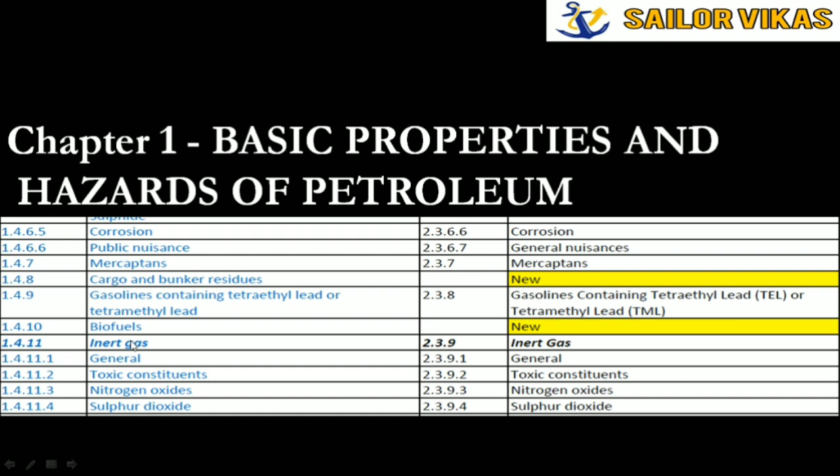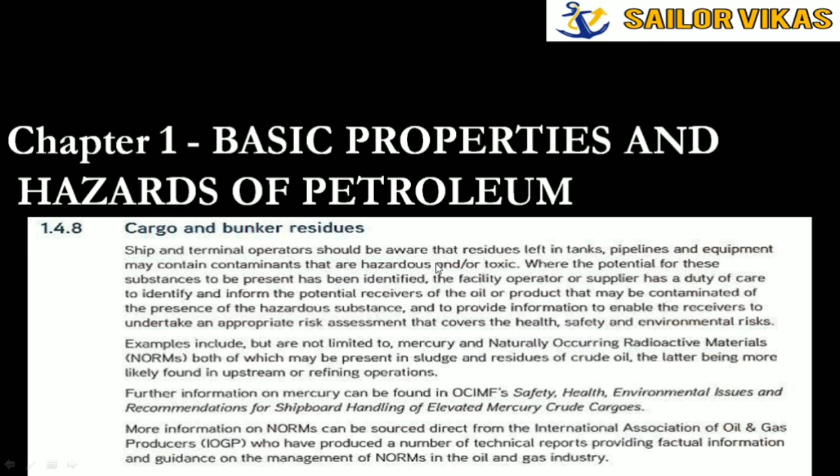Here are the changes in chapter 1, basic properties and hazards of petroleum. You can see that cargo and bunker residues are also petroleum products - although they are residues, they still have hazards. That is the reason they have introduced this section in ISGOTT chapter 1. Similarly for biofuels - they have written that ship and terminal operators should be aware that residues left in tanks, pipelines and equipment may contain contaminants that are hazardous. This is an overall statement about cargo and bunker residues, and similarly for biofuels, mentioned specifically to note that this also exists.

Other than this, chapter 2 is gas evolution and measurement. As you can see, this yellow portion is all newly introduced. For example, volatile organic compounds - this was not there in ISGOTT 5. They have added a small paragraph mentioning volatile organic compounds.

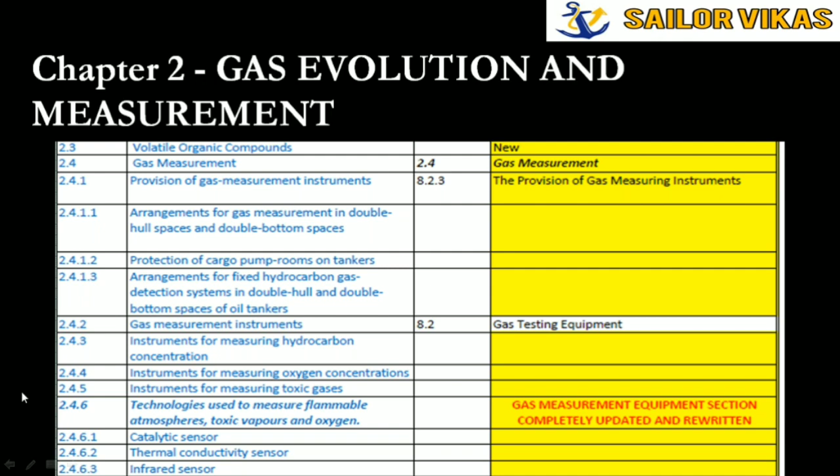Then next is about gas measurement. As you can see here, it is very exhaustive - I cannot explain it in full detail, but I will give a complete idea of what's new. Now you can see catalytic sensor, thermal conductivity sensor and infrared sensor. For the catalytic sensor, they have mentioned the operating principle. This is as per the latest technology, which is why it's important to know about all these things.

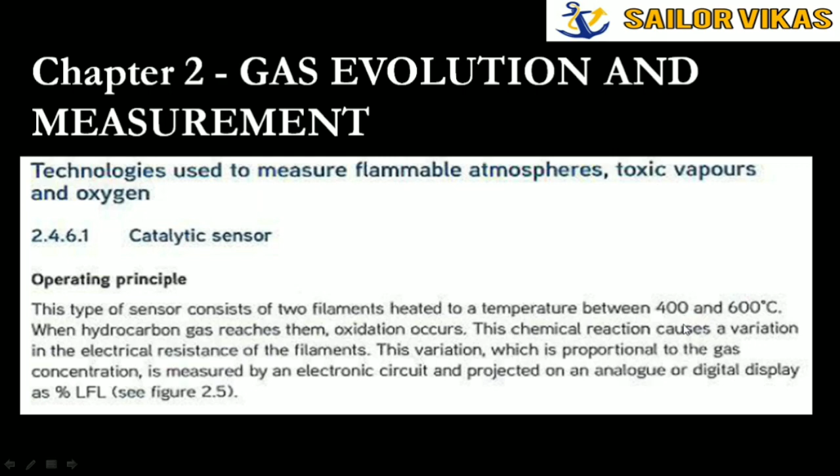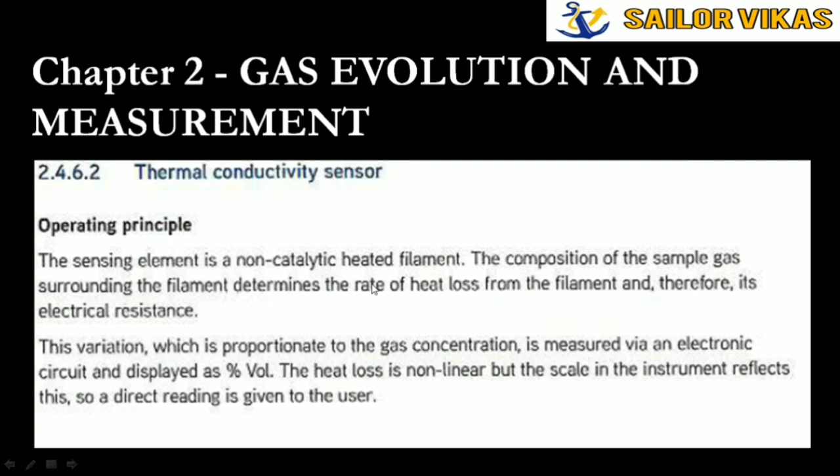The catalytic sensor is heated to a temperature between 400 and 600 degrees Celsius. They have introduced new diagrams for the catalytic heated filament sensor. Then the thermal conductivity sensor, also called non-catalytic heated filament - so they are both similar, this one being non-catalytic and the previous one being heated catalytic filament. Then again diagrams, followed by the infrared sensor with its own diagrams. So all these new technologies have been introduced with good pictures to help understand them.

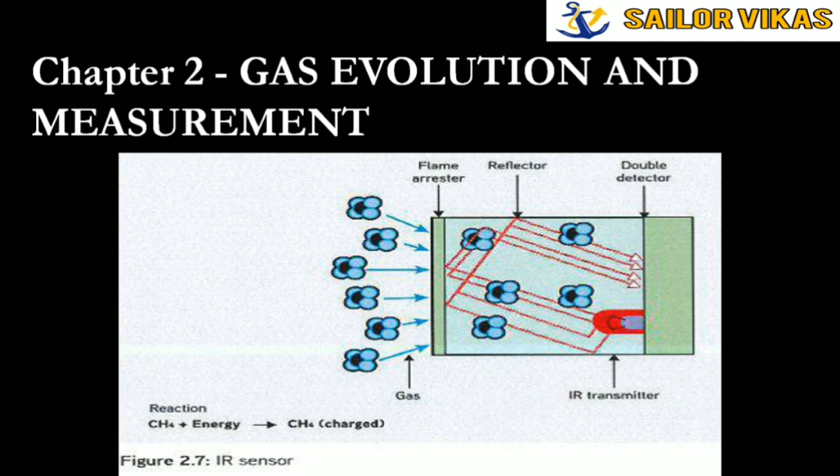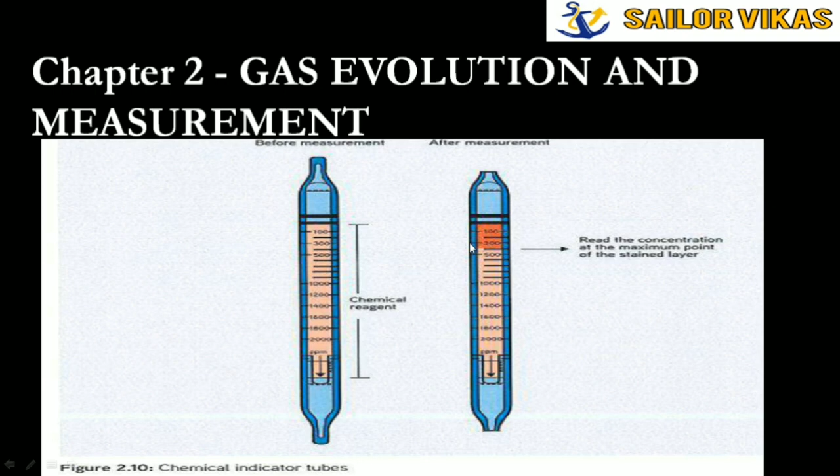Then there are the chemical indicator tubes, again with diagrams showing their use, the principle, the cautions to be observed before use, and the procedure to be followed. Then comes the paramagnetic sensor and calibration, etc.

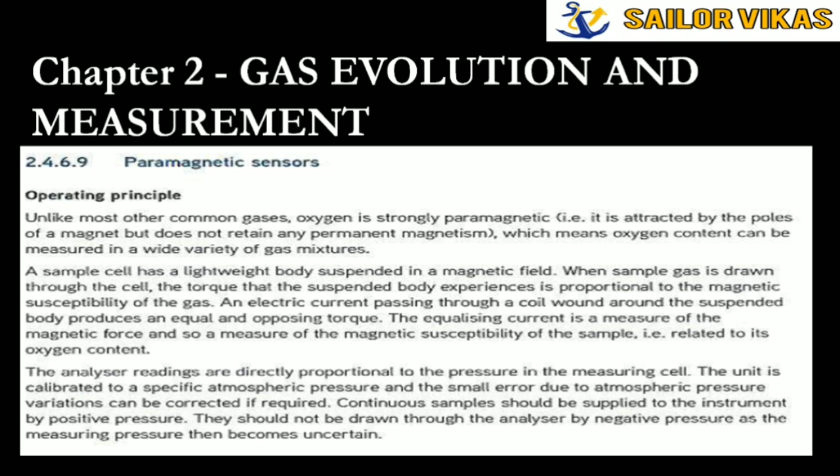The paramagnetic sensor also has a brief explanation in simple terms. They have made it very simple in ISGOTT 6, along with diagrams.

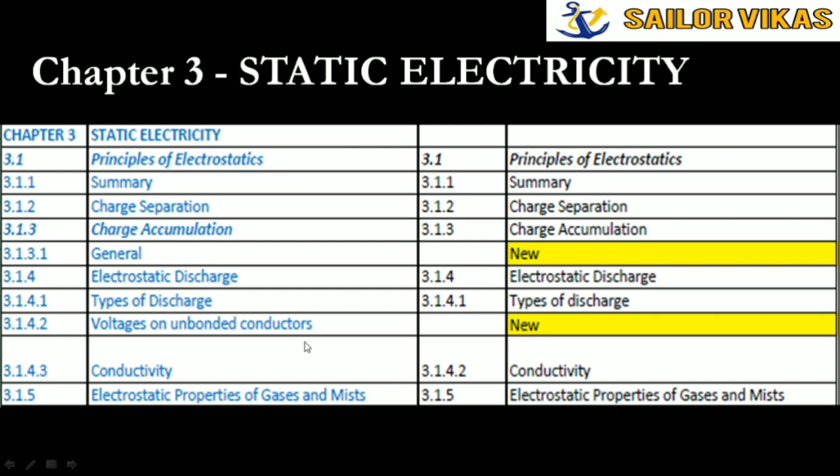Next is chapter 3, which is static electricity. Here they have introduced new sections like general and voltages on unbonded conductors. This has been newly introduced in ISGOTT 6.

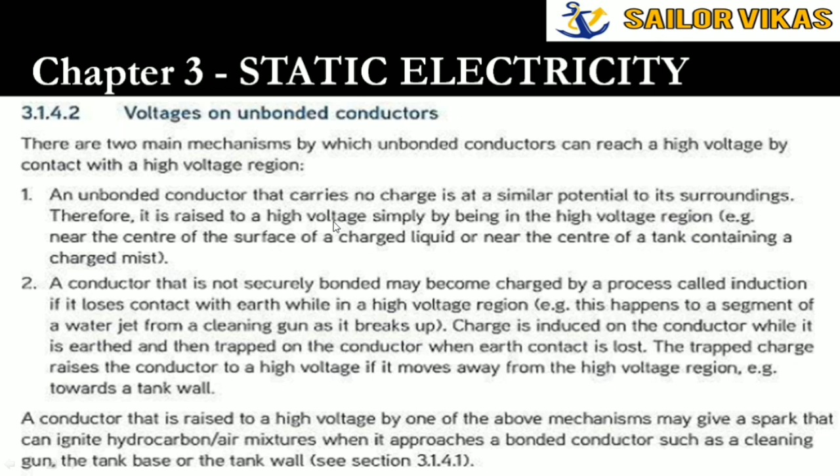This hierarchy of controls we have also learned in shell training, where you have these 5 stages: elimination, substitution, engineering controls, administration controls, and the last was PPE. So they have introduced this hierarchy of controls also in chapter 4.

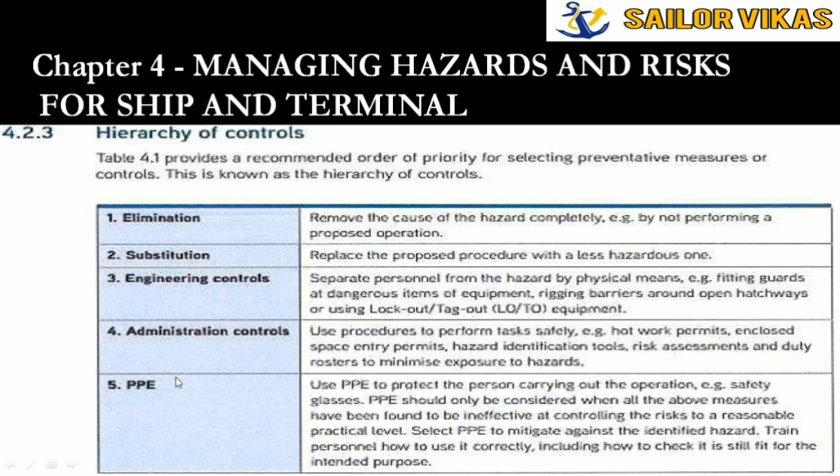Other than this, the new thing which they have introduced is stop work authority, known as SWA, and lock-out/tag-out. Stop work authority is similar to the stop card which we use on board. It is recommended that tanker and terminal SMS include a stop work authority policy and procedure. That is the new thing which they have introduced.

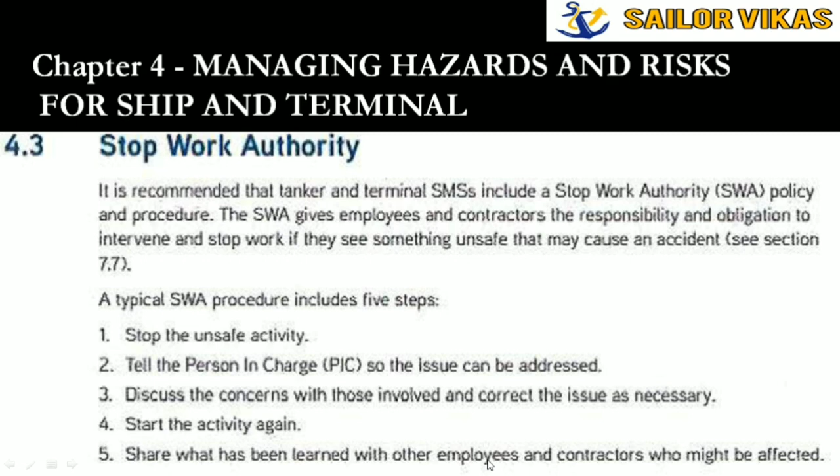Basically this stop work authority procedure includes 5 steps. You have to stop, then tell the person in charge so the issue can be addressed, whatever the issue is why you have stopped the work. Then you can discuss the concerns and correct the issue, after that you can start the activity again, and share this so other people can learn. So this is the new thing introduced, stop work authority.

The next is lock-out/tag-out. This is also introduced. We already know about this, but they have introduced it formally in ISGOTT 6. This is the lock-out/tag-out.

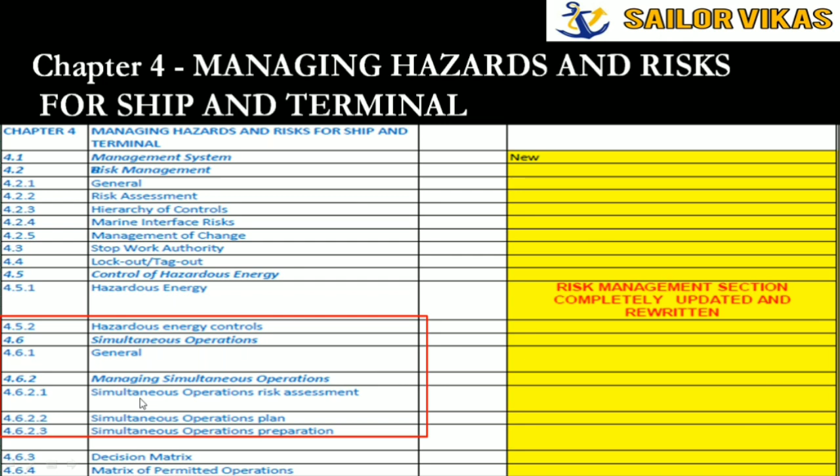Then next is the introduction of simultaneous operations. They have introduced simultaneous operation, how to manage it, what plan you have to make, what risk assessment you have to do. They have given detailed explanation and information about simultaneous operation, and how simultaneous operations cause issues when there are too many operations at the same time.

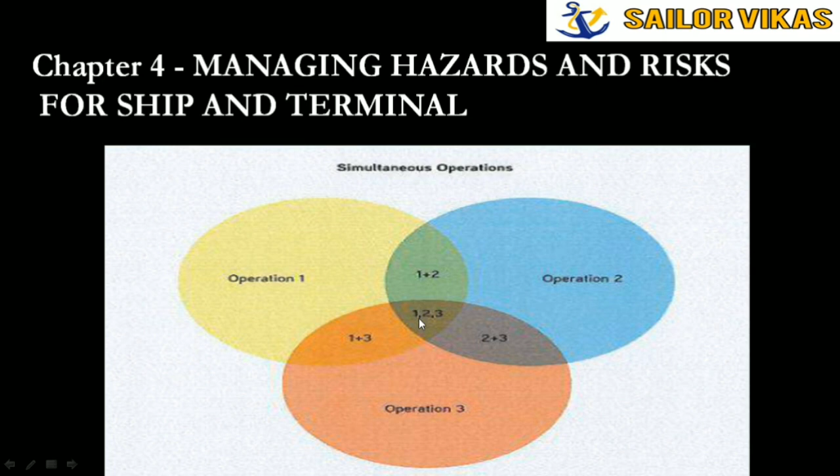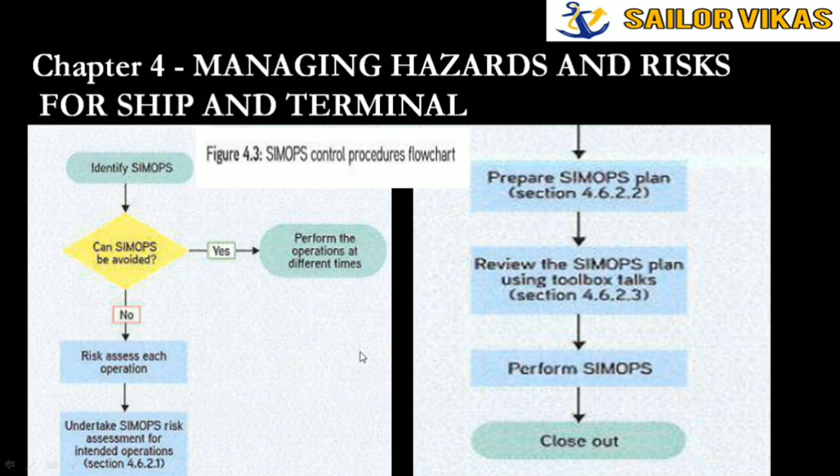Then they have made a flow chart: you have to identify SIMOPs, then ask can it be avoided? If no, then you have to make the risk assessment, discuss in the toolbox meeting, etc. So this is what they have introduced in ISGOTT 6 chapter 4.

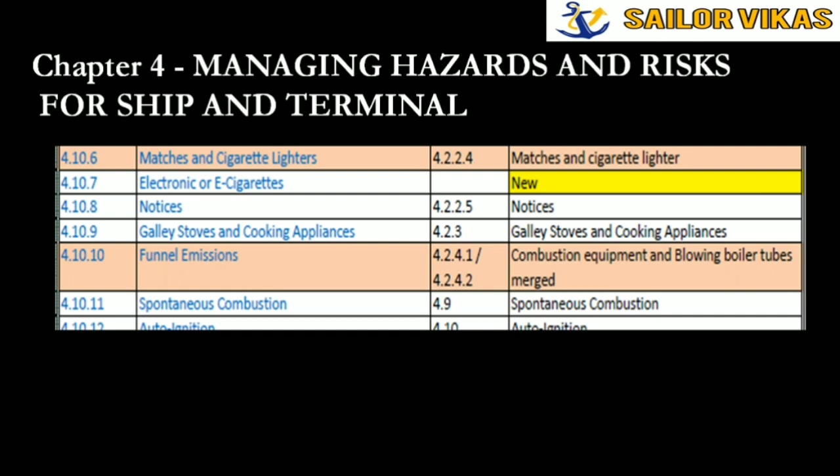Then there is also introduction of electronic e-cigarettes, newly introduced in ISGOTT 6. They state that the existing smoking rules also apply to the use of electronic or e-cigarettes. So if you have an e-cigarette, it doesn't mean you can have it on the bridge. This should be clear.

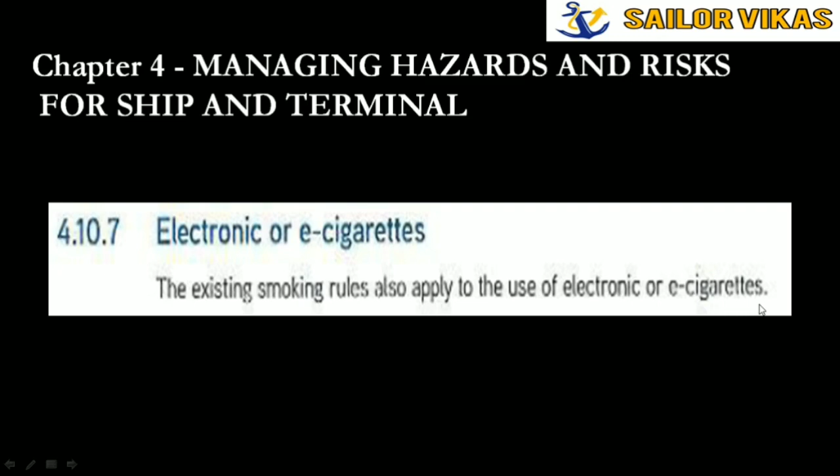Other than this, if smoking is not allowed on the bridge, you should not use e-cigarettes either, because the same rules apply for smoking.

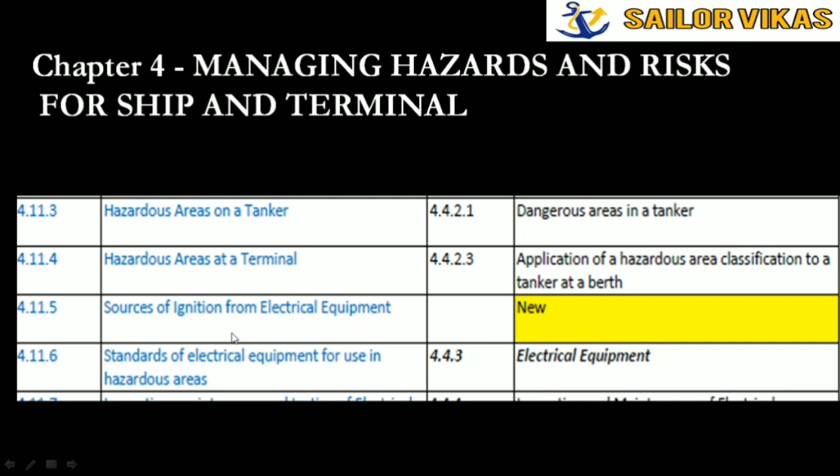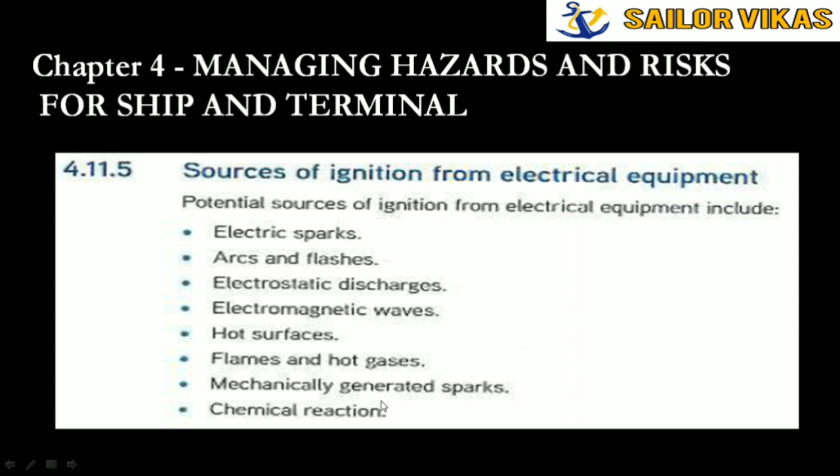The next new topic is sources of ignition from electrical equipment. This has been newly introduced. They have listed electrical equipment as also a source of ignition. For example, electric sparks may occur, electrostatic discharges, electromagnetic waves, chemical reactions - these are all causes and sources of ignition.

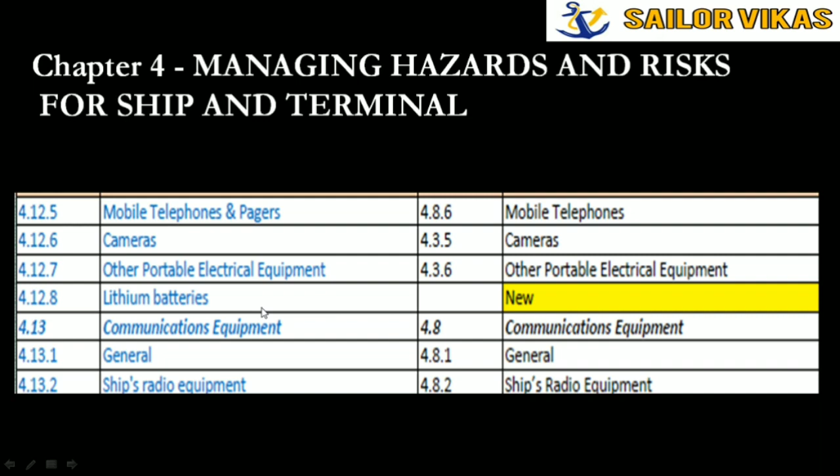Then next is lithium batteries. Initially in ISGOTT 5 this was not there. A new section on lithium batteries has been introduced in chapter 4 itself, where they speak about lithium batteries being used in a wide variety of applications, and there are 2 main types: one is primary, that is non-rechargeable, and the second is rechargeable.

These batteries have a high energy power source and they can cause fire or explode. So it is mentioned that these batteries are also hazardous and they pose risk for ship and terminal. That is why they have introduced these lithium batteries.

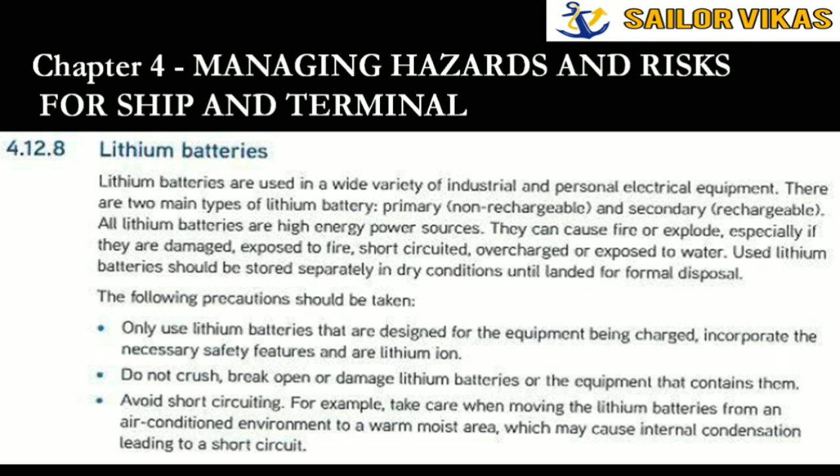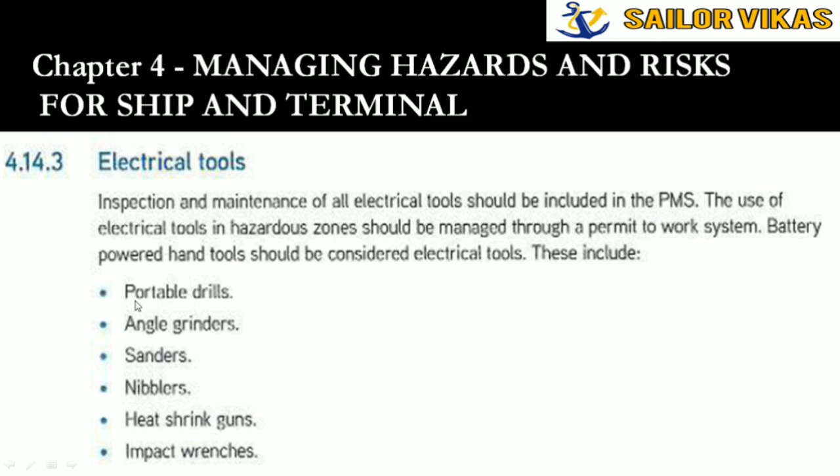Next, the new things they have included are electric tools and hydroblasting. These also have hazards, so they have stated that electrical tools should be properly maintained and included in the PMS, that is the planned maintenance system.

They have given some examples for the electric tools. Similarly, for hydroblasting, they have considered it a hazardous activity that should be controlled through the SMS and permit to work process.

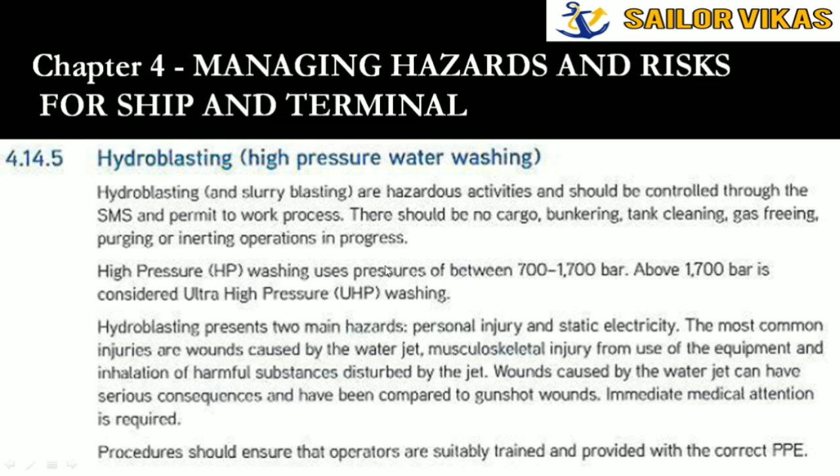They have given an explanation about the hazards. There are two main hazards: personal injury and static electricity. That is the reason there should be no cargo or bunkering, tank cleaning, gas freeing, inerting, or purging operation in progress when doing hydroblasting. That is what they have told clearly in ISGOTT 6.

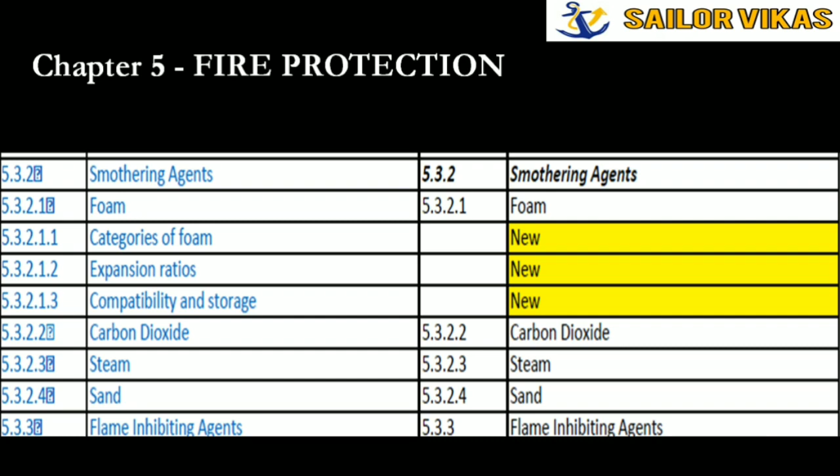The next thing is in chapter 5, fire protection. They have introduced categories of foam. This was there earlier also, but the expansion ratios have been newly told to us - what are the categories of foam, the expansion ratios, I will tell you the changes, and the compatibility and storage, how you store this foam.

They have given that if there is a fluoroprotein foam, then it is a part of protein foam. And if it is an alcohol resistant AFFF foam, then it is a synthetic foam. They have clearly given us an idea of which is a synthetic foam and which is a protein foam.

Sometimes even I had got confused if I had AFFF foam on board and was not knowing whether it is a protein foam or a synthetic foam, because in SIRE requirement they say both have different requirements. So ISGOTT 6 has clearly distinguished between the two types of foam.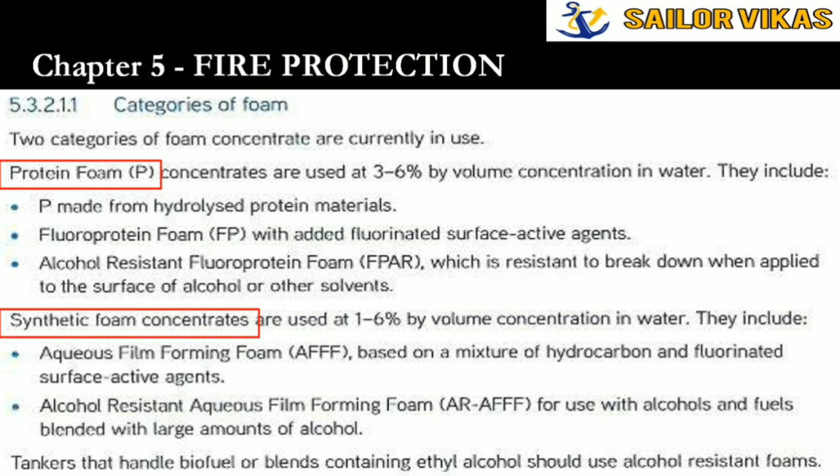Then the expansion ratio. For high expansion foam, there is now a synthetic high expansion foam mentioned in ISGOTT 6, where they have given a ratio of 200:1 to 1000:1. And for enhanced high expansion foam, they have given an expansion ratio of 250:1 to 1000:1. So this is about high expansion foam.

They are nearly the same. But for medium expansion foam, it is now written as 20:1 to 250:1. For ISGOTT 5 it was 15:1, but for ISGOTT 6 it is 20:1. This is an important thing to remember - this is a change made in ISGOTT 6. It was 15:1 earlier; rest all things are the same.

The 3:1 and 15:1 ratios are also the same, but this medium expansion foam has been changed. And the synthetic high expansion foam and enhanced high expansion foam were not mentioned in ISGOTT 5, but now they have mentioned them and given different expansion ratios for both foams. I hope this is clear.

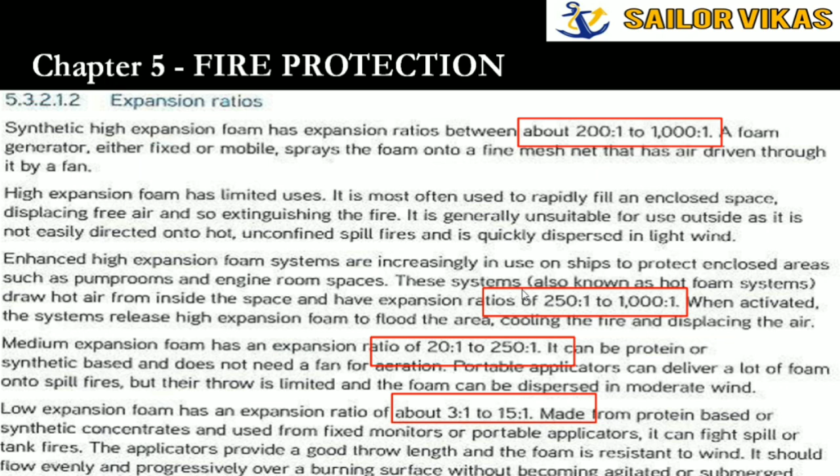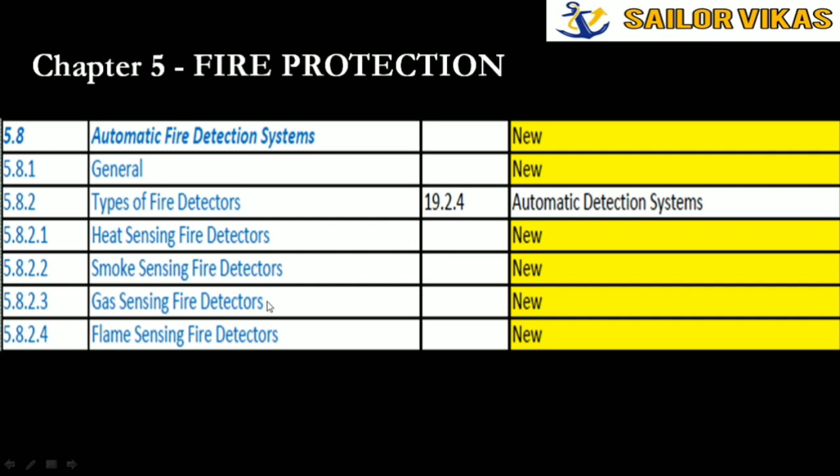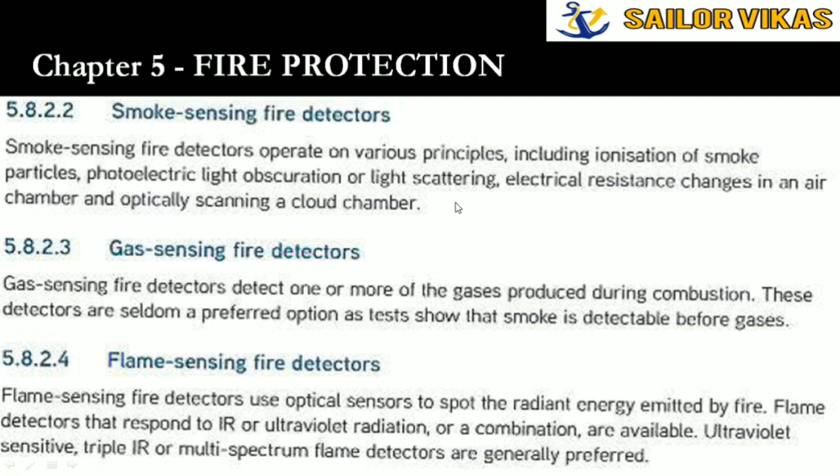The next changes made in the same chapter 5, fire protection, are the detectors - the types of fire detectors: heat sensing, smoke sensing, gas sensing, and flame sensing. They have introduced all this new along with the automated fire detection system section. They have given detailed theory about all types of fire detectors.

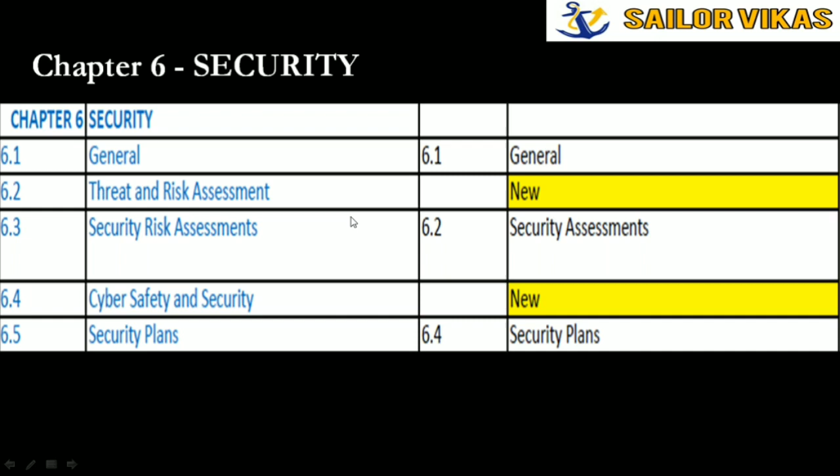So in this 6.2 threat and risk assessment, they have introduced a threat triangle where removing one side of the triangle will minimize the risk. There is capability, opportunity and intent. So if you remove any one part, similar to a fire triangle, the risk of threat can be minimized. It cannot be eliminated, but it will be minimized.

So they have given clear definitions of what capability means, what intent means, and what opportunity means. Capability means attackers have the physical means to attack. Intent is demonstrated by the will and means to attack. This is what they have defined about the parts of the threat triangle.

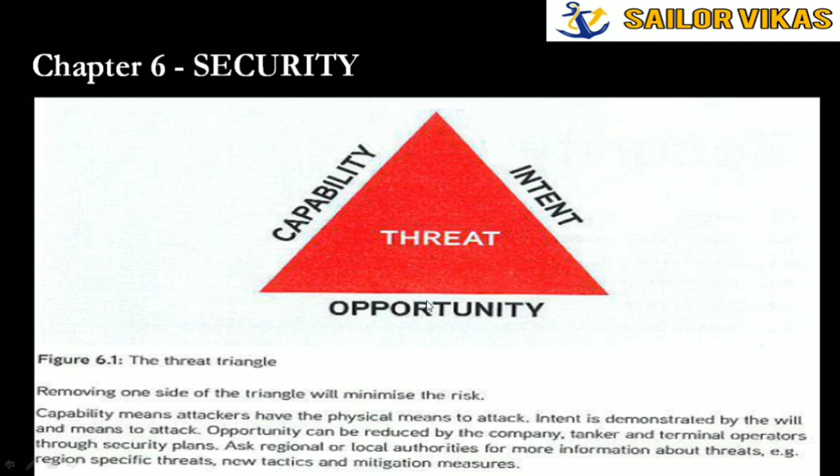The next is cyber safety and security. They have clearly mentioned about cyber safety and security. Cyber security is concerned with the protection of IT, operational technology, information and data from unauthorized access, manipulation and disruption. Cyber safety covers the risk from loss of availability or integrity of safety critical data. OT is operational technology. That is why this has been introduced to minimize cyber crimes.

The cyber security risk assessment should consider threats to cyber safety and cyber security, because attacks there can harm personnel, environment and the tanker or terminal. Since ISGOTT is for tankers and terminals, cyber safety and security is an important chapter. The IMO has adopted this maritime cyber risk management. So this is an extract of ISGOTT 6.

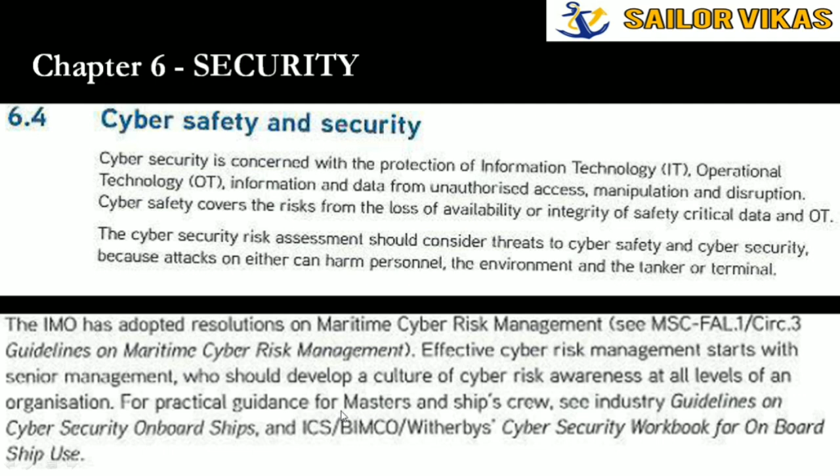Next is an important chapter, chapter 7, which has been completely introduced new, human factors. Now in human factors, the human element, they have introduced a lot of things about risk assessment, then leadership and confidence to stop the work or speak up. Fatigue and manning levels were already there in the previous ISGOTT 5, but topics like risk assessment, leadership and confidence to stop the work have been introduced newly in ISGOTT 6.

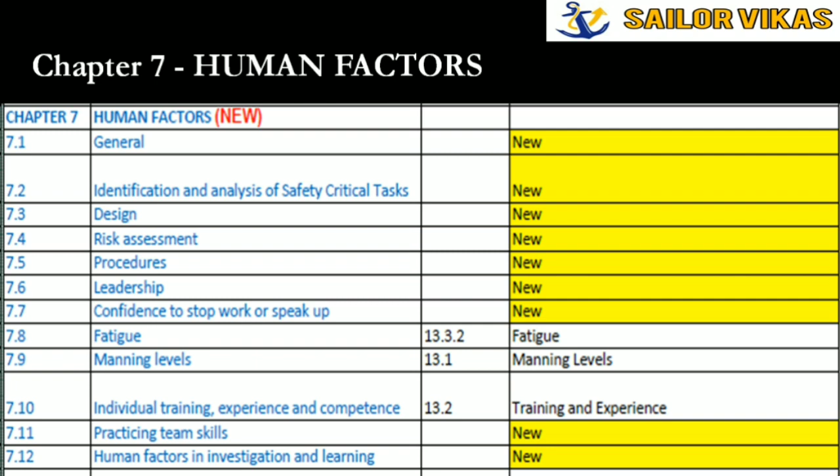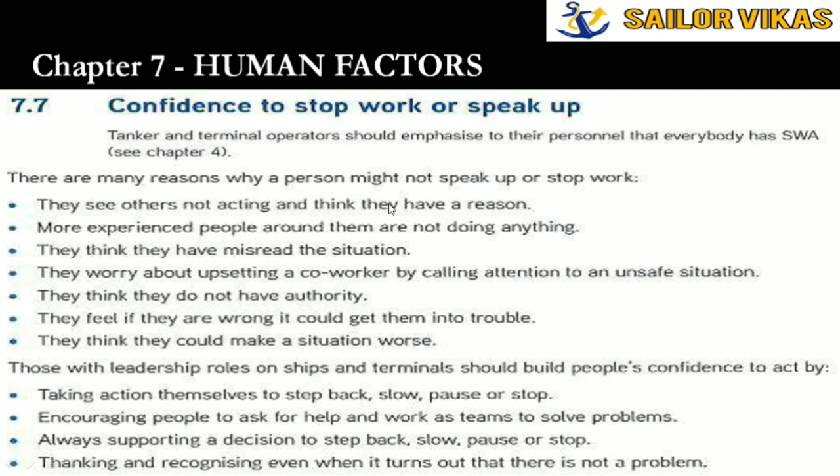So they have introduced this section for leadership, and confidence to stop the work or speak up. They have also told us about human factors, that there are many reasons why a person might not speak up or stop work. These are all examples of why he may not speak up. That is why there is a need for confidence to stop the work or speak up. Thus human factor is very important as per ISGOTT 6.

Then there is chapter 8, alternative and emerging technologies. This is my favorite chapter. This chapter is also introduced newly in ISGOTT 6. Now as you can see, alternative and emerging technologies.

For example, earlier we were using charts, now we are using ECDIS. This is an emerging technology which we are using in the current phase. Similarly in cargo, we have touchscreen cargo panels, we have alarms, and just by sitting in the cargo control room we can get all the soundings of our tanks. So these are all emerging technologies which are coming up day by day. New things are coming up, and that is why they have introduced this chapter.

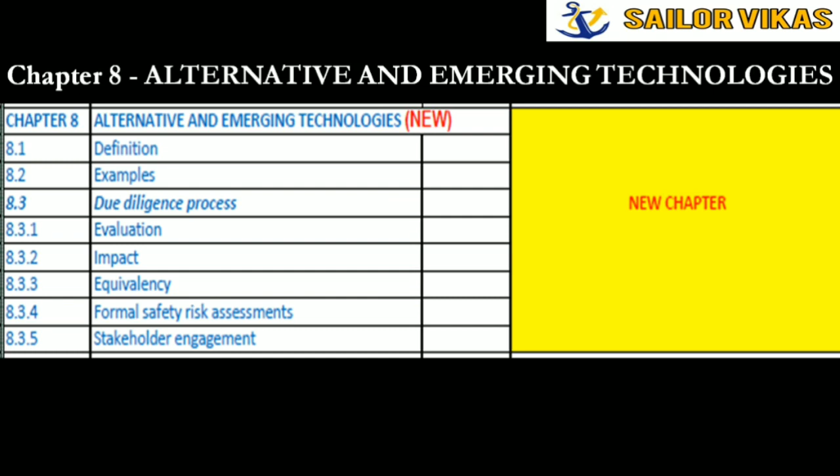Now the importance of this chapter I will tell you further. Chapter 8, alternative and emerging technologies, describes how alternative and emerging technologies can be assessed to make sure they do not affect the safety on tankers and terminals. Because of new emerging technologies, there is a chance that they will affect the safety on tankers and terminals. Thus they have made this chapter so that we know this emerging technology should not harm our tanker industry.

Similarly in MEG it has been mentioned about emerging technologies, so you can go through there and refer to get some knowledge about that. For example, what are the emerging technologies? There were autonomous ships, autonomous underwater vehicles, intrinsically safe electronic tablets and telephones, drones, aerial drones, etc. These are all examples of emerging technologies, and these technologies should not harm the tanker and terminal. That is the reason they have introduced this chapter 8 in ISGOTT 6.

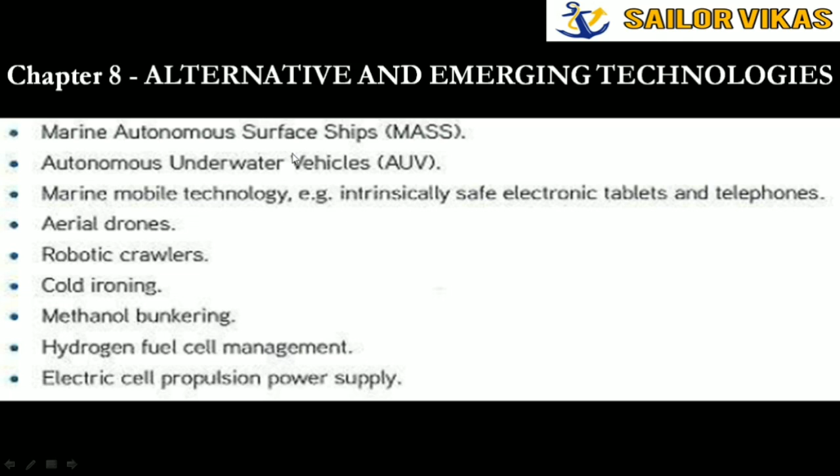Next, in the same chapter they have introduced a section on impact, which I found little important. This impact section tells that whenever there is an emerging technology, there should be an impact assessment done before agreeing to use the same technology. After you do the impact assessment, you will come to know what all things can go wrong. That is why they have introduced this section in chapter 8 in ISGOTT 6.

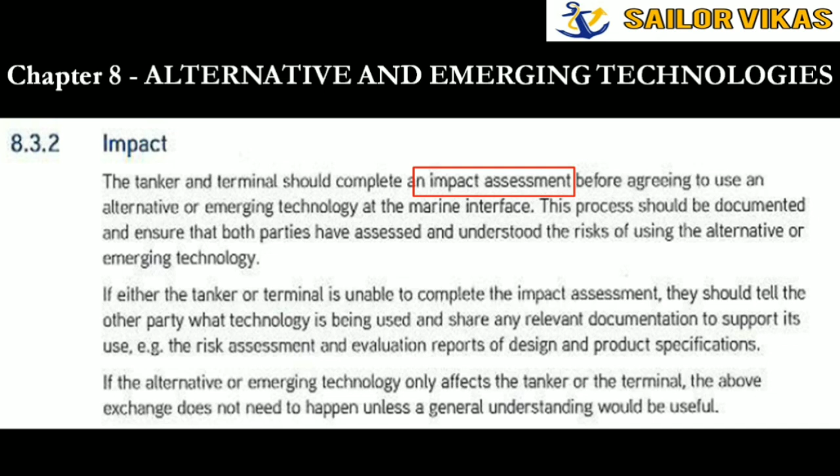Similarly, equivalency. If we are using the old method and there is an emerging technology, there should be a method of equivalency. Both should demonstrate the same things with good output. That is why there should be an equivalency, and that is why they have introduced this section in ISGOTT 6.

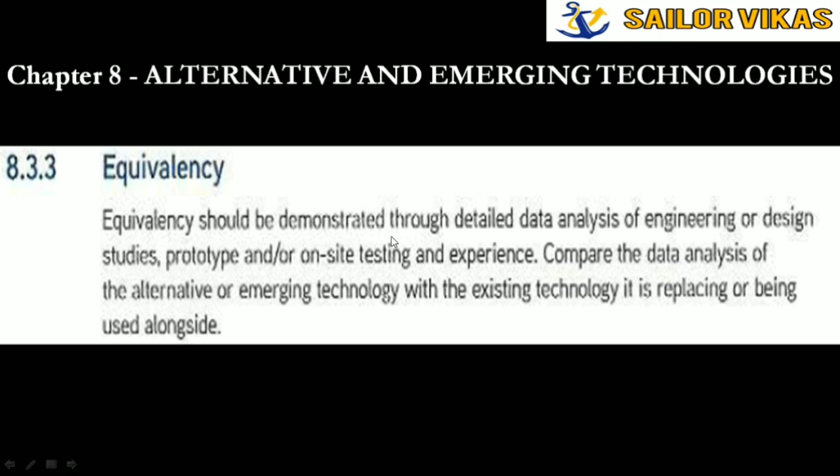Next is definition of hot work. They have introduced this. Earlier we didn't have the proper definition of hot work, so they have given a proper definition of hot work.

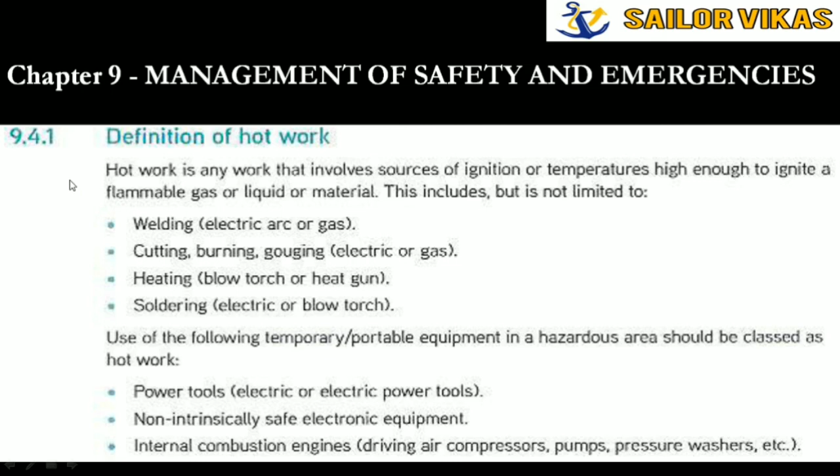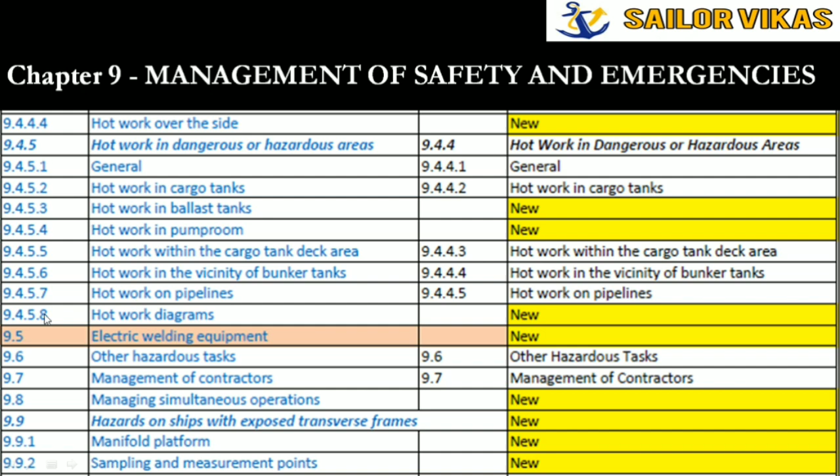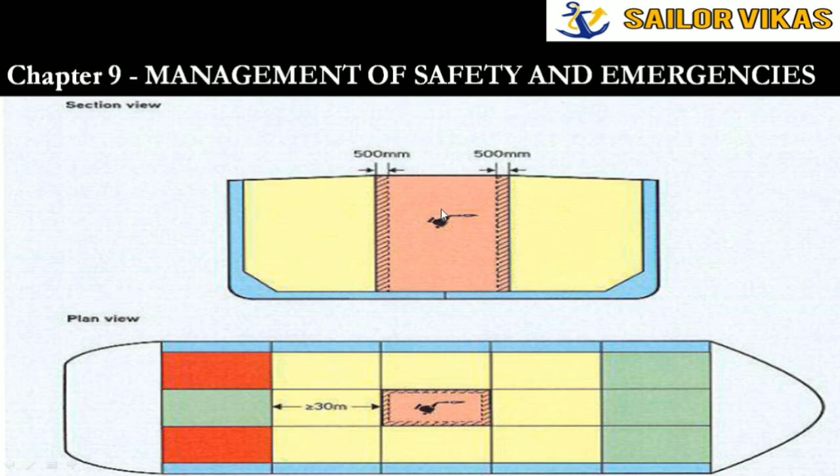Some of the parts I will show you - they have introduced hot work diagrams. This is one example of a hot work diagram. They have given all the color shaded areas, and this is the portion where a person has to do hot work. Why did they do these color shaded areas? Because they have designated all the areas where no hot work should be allowed.

Then this yellow portion is emptied, cleaned and gas freed with hydrocarbon not more than 1% LFL. So this yellow portion should be cleaned and it should be gas free basically. This is the example they have given, showing how you have to identify the diagram.

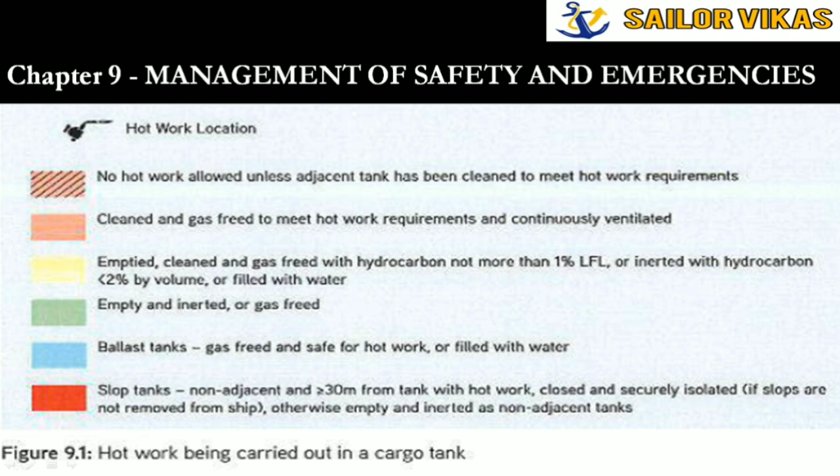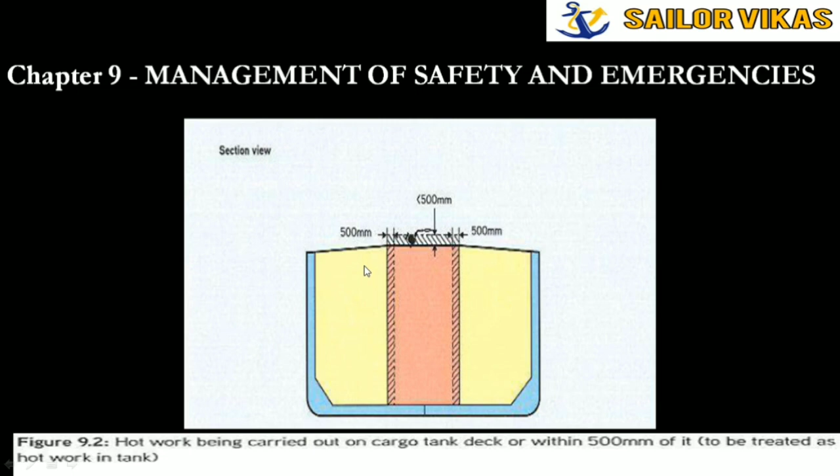So they have given various types in which you have to do hot work. For example, now this is hot work being carried out inside a cargo tank. Similarly, there is a section where you have to carry out hot work on the cargo tank deck or within 500 mm of it, that is the top area. Similarly, if you have to carry out hot work inside a bunker tank, they have again designated the color codes for how you have to carry out the hot work.

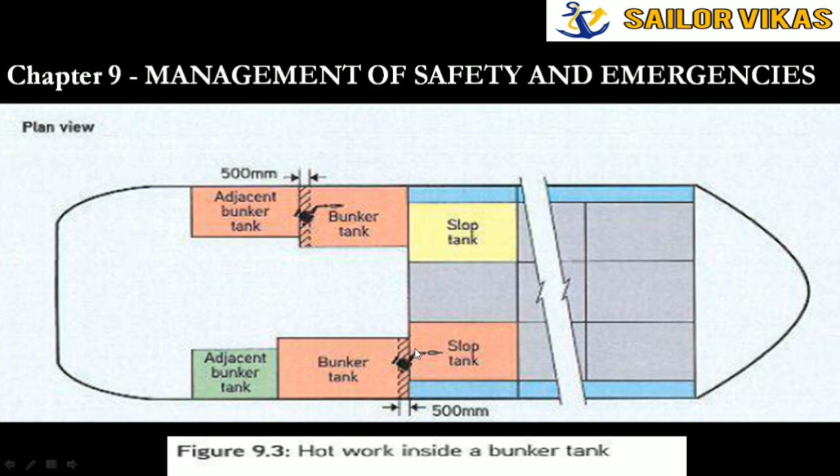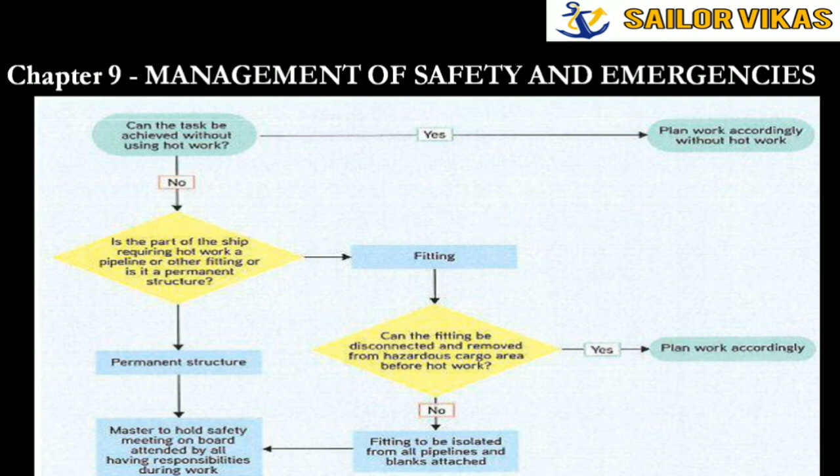Then they have made a flow chart for hot work - what time you can do it, what is the procedure, how you have to follow the hot work. So various hot work flow charts they have given.

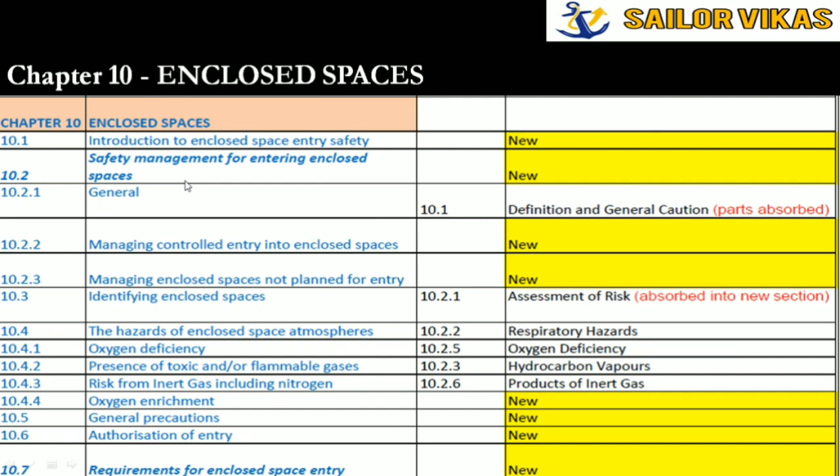As you can see here, the first thing is introduction to enclosed space entry. In ISGOTT 5, the definition mentioned the second point as unfavorable natural ventilation, but in ISGOTT 6 the definition has slightly changed. We have to remember that it is not unfavorable natural ventilation, but poor natural ventilation - that is the definition change in ISGOTT 6.

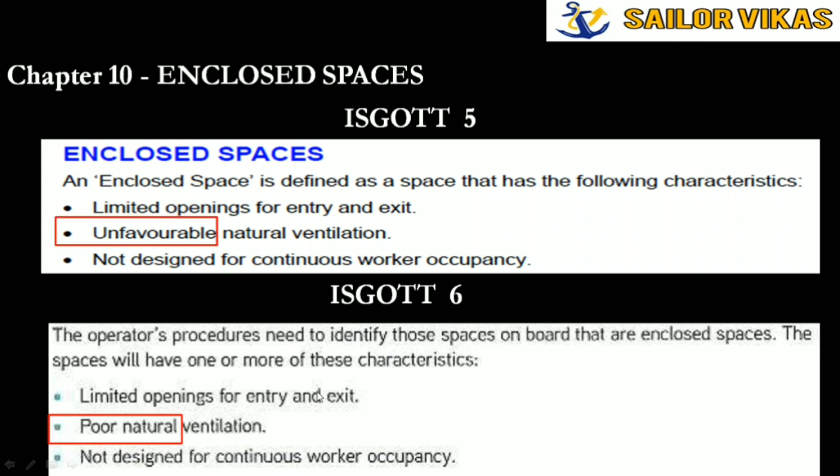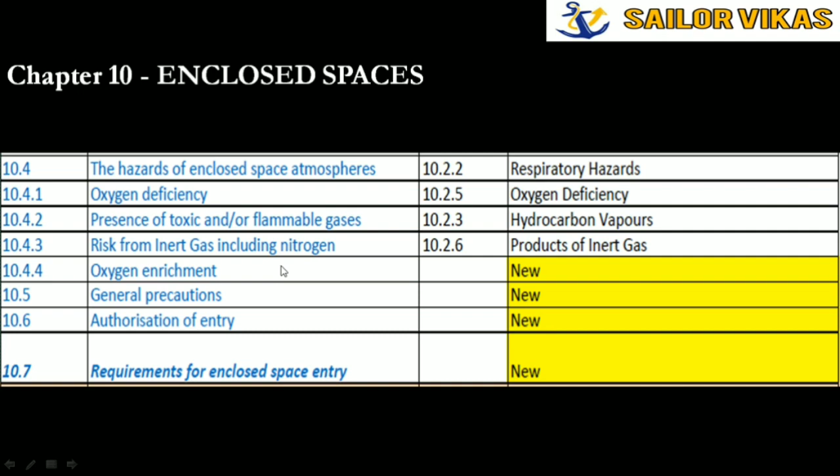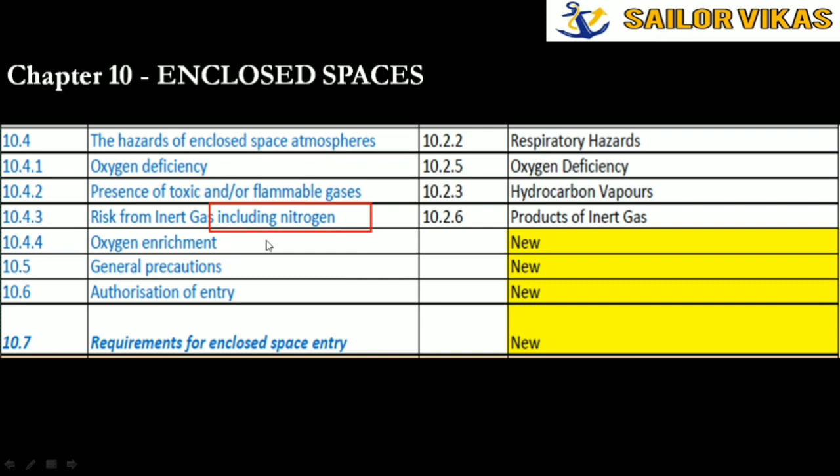Next is oxygen. They have introduced this section on risk from inert gas including nitrogen. In ISGOTT 5 there was only a section called products of inert gas, but they didn't include nitrogen - they had not mentioned anything about nitrogen particularly. So in ISGOTT 6 they have told about nitrogen: the addition of nitrogen reduces the oxygen content and lowers the CO2 level in the blood. CO2 in the blood stimulates the breathing reflex, and when nitrogen replaces it, this reflex is inhibited.

I hope you guys know that nitrogen is a very dangerous gas. The moment you take nitrogen, you will forget about breathing because the breathing reflex is inhibited. As soon as nitrogen enters your body, you cannot breathe after that. Your body will not know that there is oxygen deficiency, because when you inhale nitrogen, it reduces the oxygen content, and since oxygen content is reduced, the CO2 levels in the blood will reduce. Since CO2 levels reduce, it does not stimulate the breathing reflex. Breathing reflex is like a normal process, same as the heart beating, breathing is also a natural process. So this will be stopped if you inhale nitrogen.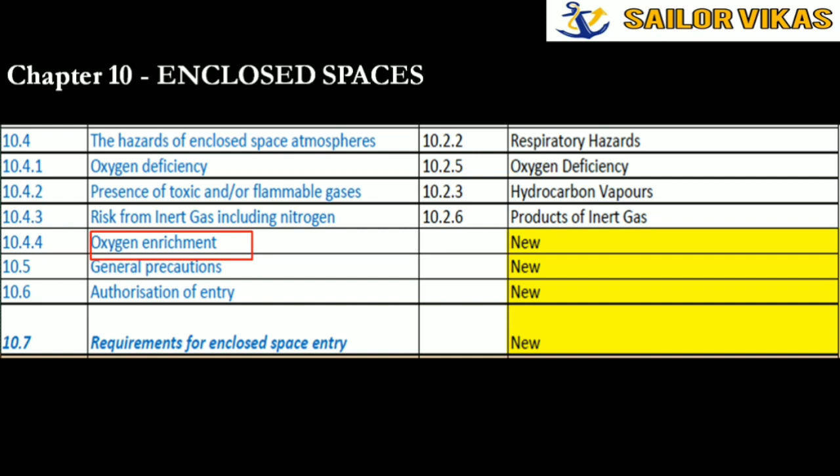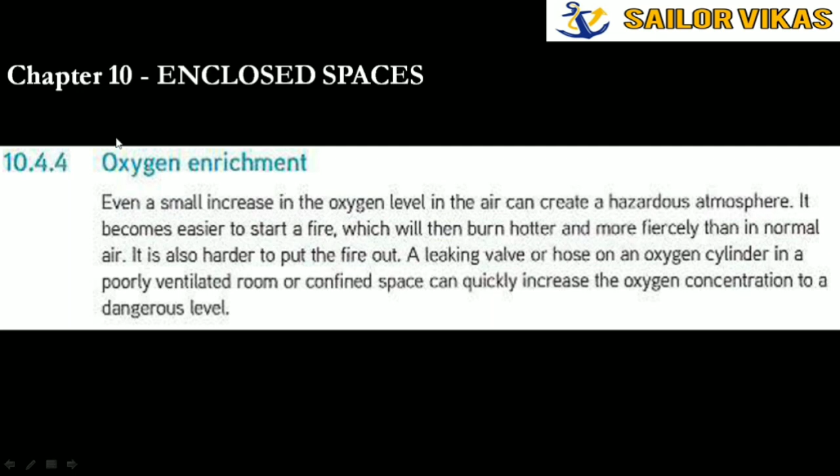This is a very important section they have introduced in chapter 10, enclosed spaces. Other than oxygen deficiency, they have introduced oxygen enrichment, which was not mentioned before. In ISGOTT 6 they have mentioned that even a small increase in oxygen level in the air can create a hazardous atmosphere. Now think, in what area of the ship is there oxygen enrichment? I hope you've guessed it right. There is only one place on a ship with pure oxygen, that is the hospital. So even if there is a slight leakage in the bottle, since hospital is a closed space, this oxygen leak will cause an oxygen enriched atmosphere, which is dangerous and hazardous for health. Thus they have mentioned the hazard of oxygen enrichment also in this section.

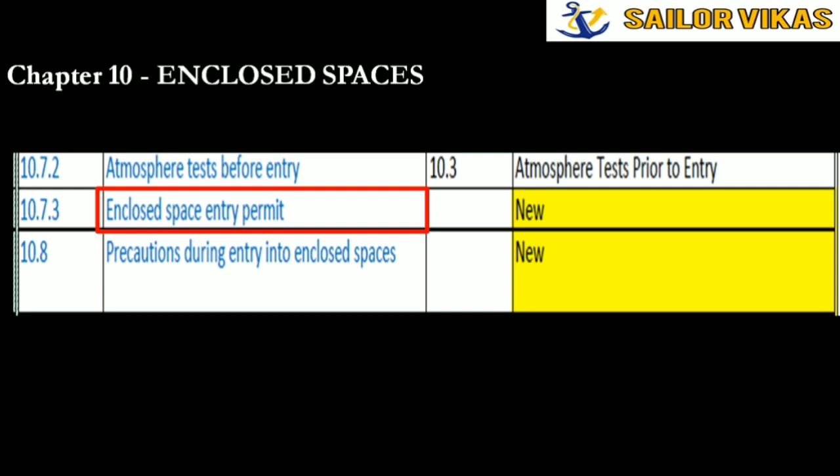Next, they have introduced a new section for enclosed space entry permit. They have told that the permit should not exceed 12 hours, and they have recommended that the period between testing should not exceed 30 minutes. So the testing, they have just recommended it should not exceed 30 minutes. This section was earlier not there in ISGOTT 5, but they have introduced it in ISGOTT 6, so that the idea remains clear of what we have to do.

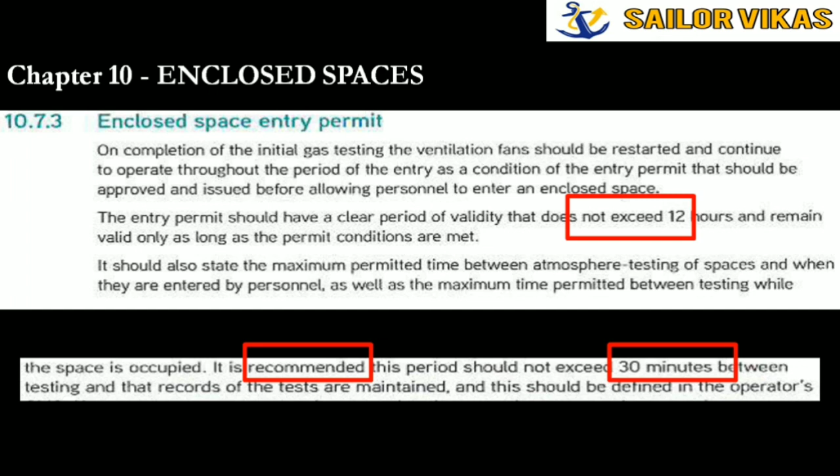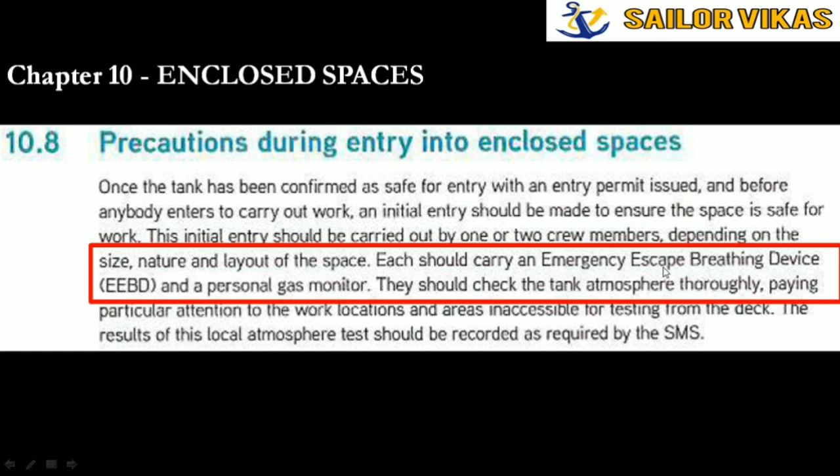Similarly, precautions during entry into enclosed space they have introduced, where they speak that each one who is entering an enclosed space should carry an emergency escape breathing device, called EEBD, and a personal gas monitor. So this they have to carry when they are entering an enclosed space.

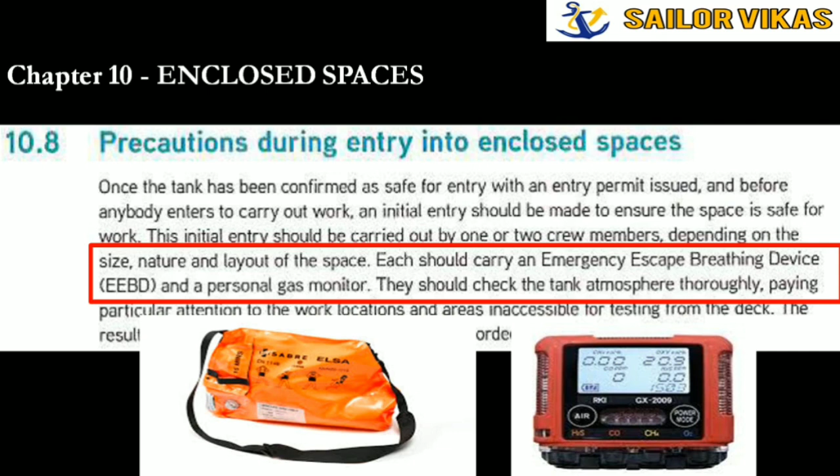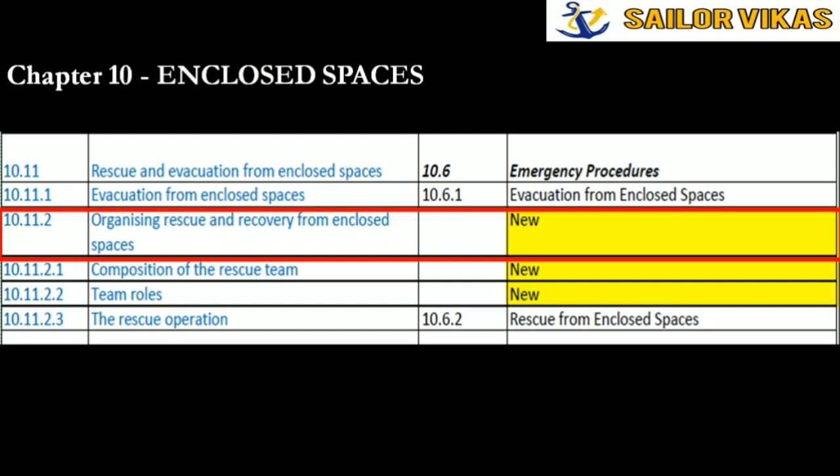Other than this, they have also introduced new sections like organizing rescue from and recovery from enclosed spaces, where they have given detail about how you should organize and rescue the person from an enclosed space. They have told that emergency rescue team members should be prepared for physical and technical demands, well trained in all rescue team duties, familiar with rescue equipment, etc., and capable of fulfilling any role within the rescue team. They introduced this section so that we are aware of what they expect from the emergency rescue team.

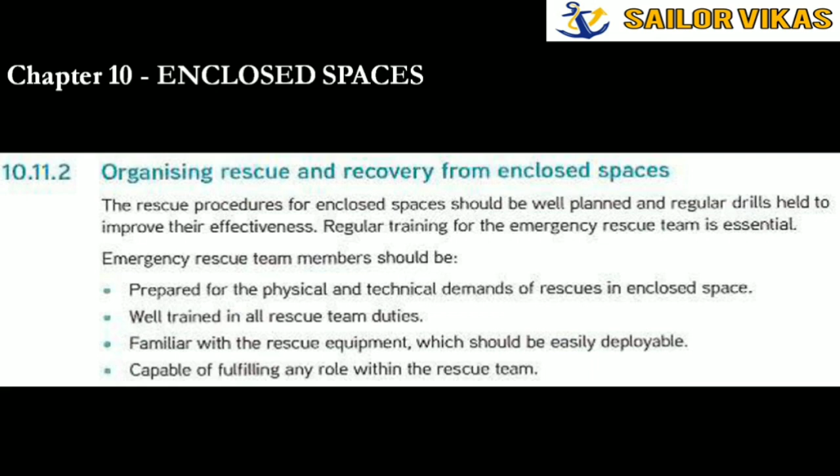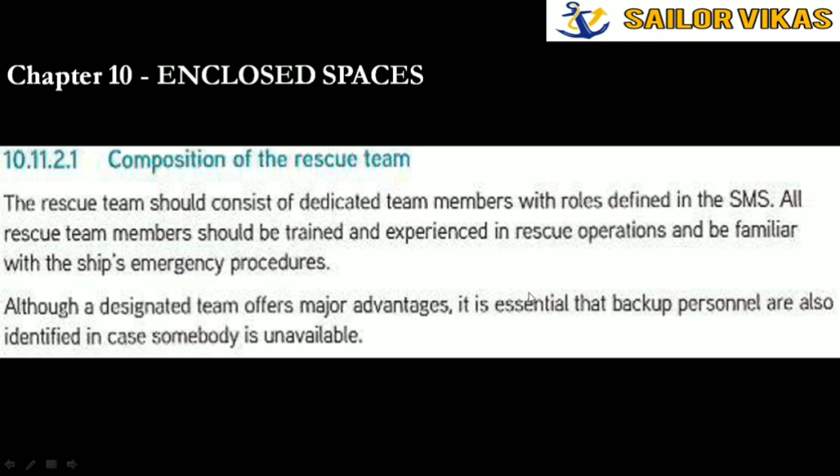I hope, guys, till now, till chapter 10, you have a clear understanding of what all new things have been introduced in ISGOTT 6. The next chapter 11, I will be continuing in another video.